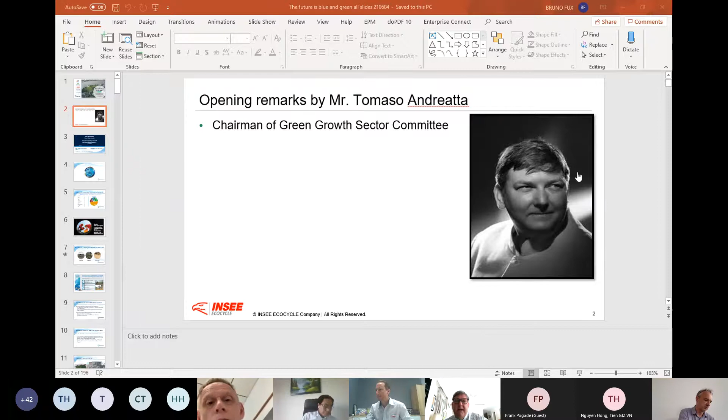As we know from science, life came out of the sea, and many myths around the world tell us how the sea would take life away, as in The Last Wave, an Australian Aboriginal myth that may be a memory of the post-glacial era, or maybe a warning of what will happen if we do not cease to heat the Earth's atmosphere. About 40% of the world population, according to the UN, lives within...

Tomaso? Yeah. We cannot... Can you hear me now? Yes, yes, yes, sorry, now it's good. Excuse me, tell me when I was interrupted.

That life comes from the ocean, and it can be taken away by the ocean. And that's all? Yes. So about 40% of the world population lives nearby the sea. We know that? Yeah, go ahead. Yes, please. Excuse me? Yes, please go ahead.

In the last 10 years, the sea level has been rising on average 3.6 millimeters per year. So by the year 2100, the sea may be 36 centimeters higher than at the beginning of the century. Still a lot less than the 10 meters higher it reached at the end of the glacial era, which gave so much hassle to Sid, Manfred, Diego, and friends from the Ice Age. Should we not be worried then?

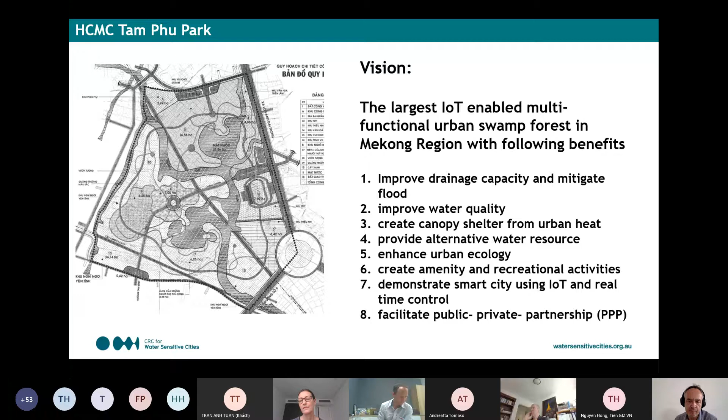Skip that slide. Just to remind everyone of the vision that we collectively created from the last training session: the vision for Tam Phu Park is that we want it to be the largest Internet of Things enabled multifunctional urban swamp forest in the Mekong region, with a broad range of benefits. So the updated strategy and nature-based solutions are what's going to underpin and deliver that vision.

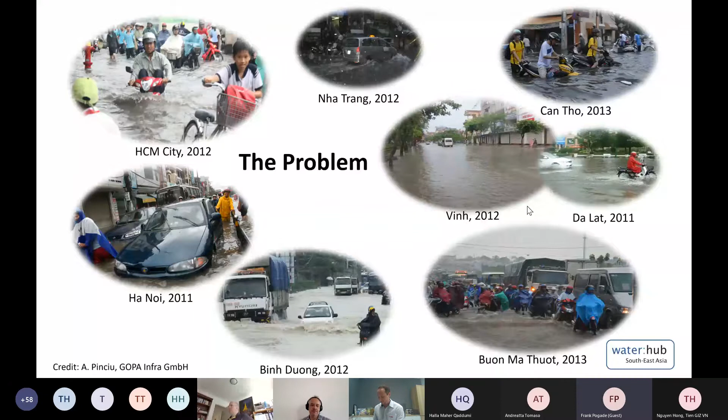There is some background noise. Could everybody please switch off the microphone?

Furthermore, numerous homemade problems are worsening the drainage situation in urban areas. Many of the mentioned reasons could be fixed through proper management actions that are actually not requiring huge investments or budgets. Based on my experiences in Vietnam, the very poor construction quality of much of the water infrastructure can be blamed for the many malfunctions, overloadings, and subsequent failings of the drainage system. If this underlying problem cannot be solved, all potential solutions we are suggesting in this webinar are doomed to failure.

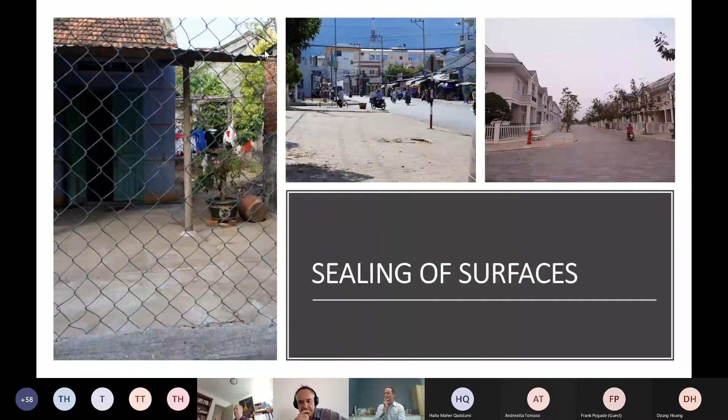The solution for all this could be blue-green infrastructure, or BGI. It's a growing market around the globe, based on pilots and basic research work done in Europe, Australia, and the US. BGI is definitely a success story in countries like China and Singapore. European directives are already requiring its application. An example from Germany: it is practically forbidden to connect new urban areas or industrial zones to existing stormwater drainage systems. All stormwater needs to be handled on site. This may be impossible under Vietnamese conditions, but BGI will definitely mitigate flooding and related damages to the economy.

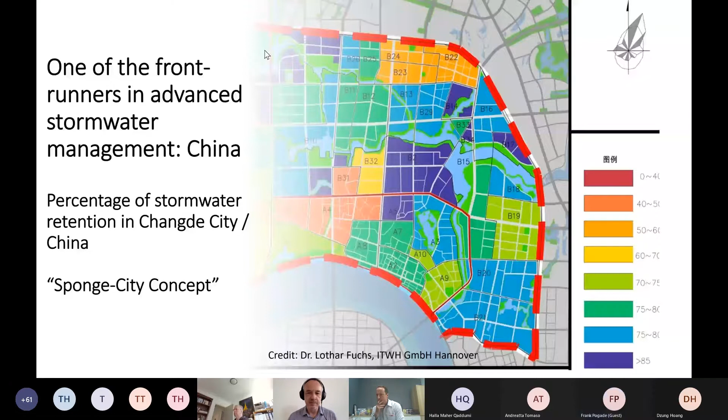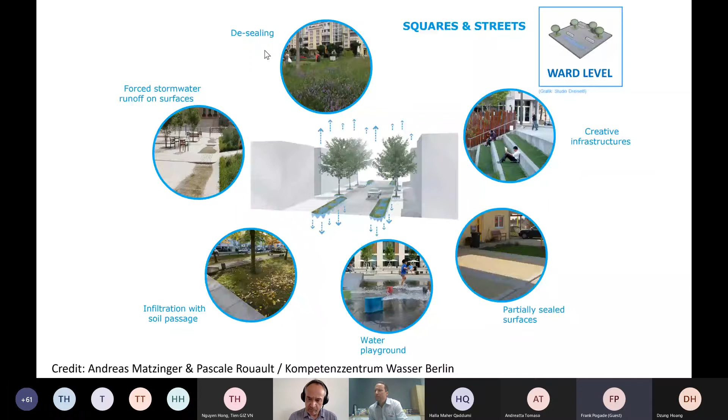On ward levels and in public spaces, the city administration can do a lot. This slide suggests a few measures. It is important to mention that many of these solutions can be applied to existing structures. That's very important, like desealing of concrete pavements.

On ward levels, green spaces play an important role. It is obvious that modern stormwater management will come with more green spaces for recreation, as you see here, even water playgrounds for children. Here, landscapers are to be called in.

The good news is there's already a lot of guidance on the planning and design of BGI around, and much of it in Vietnamese language. More and more trainings and workshops are coming up, which are supposed to equip planners and engineers with the required knowledge.

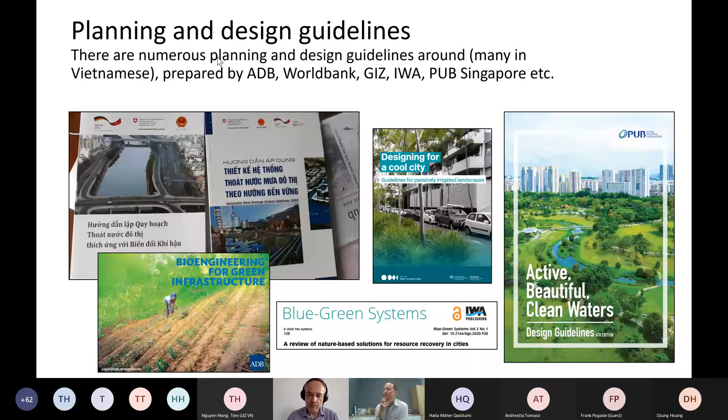Core to the SUDS principle is the integration into urban planning. It's probably the most difficult task to implement under Vietnamese conditions. It is, however, the precondition for success.

SUDS need physical installations for storage and retention of stormwater. They are usually underground or in buildings. The stored water will be released to the drainage system after the rain event, or used for irrigation, production, toilet flushing, etc. It could also be infiltrated into the ground.

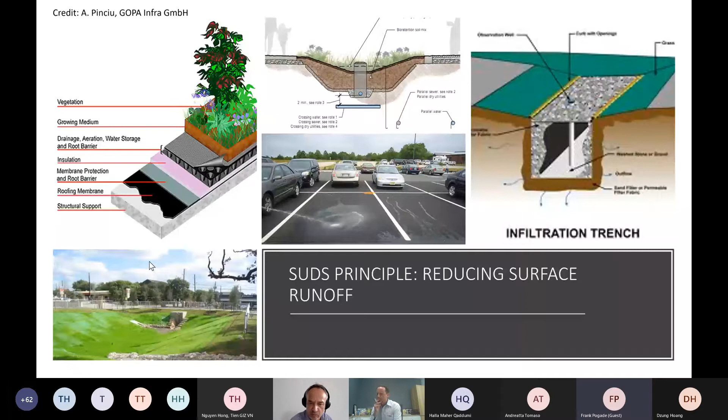There are dry and wet solutions and combinations of both, meaning water will be visible or invisible in the city. Either way, water will shape the urban landscape.

There are first examples in Vietnam, like this one in Saigon. It is a very nice starting point. It's Sala City in District 2. If you are around, go there, have a look. It's a very, very pleasant area, also very nice for a picnic.

The identification of potential SUDS applications requires a lot of knowledge on urban planning, landscaping, and technical solutions. Hydraulic and hydrological calculations have to be done, and this is not an easy task. Planting a few trees here or there does not help.

GIZ has carried out the first pilot project and applied SUDS in five Vietnamese cities, namely Quang Ngai, Quy Nhon, Tuy Hoa, Nha Trang, and Soc Trang. The table indicates the technical solutions that have been applied in the respective cities.

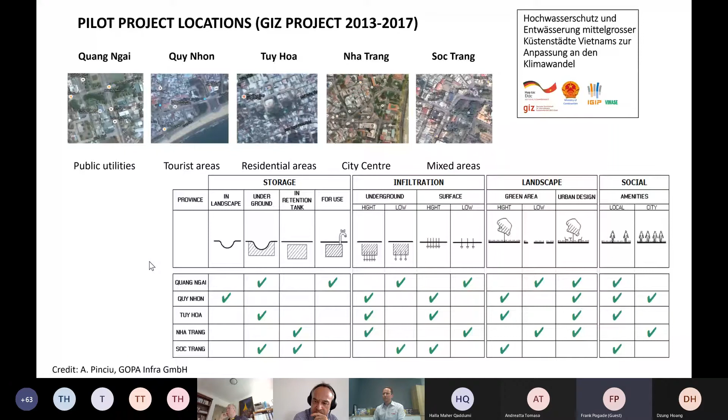These SUDS activities have been implemented, among others, in Quy Nhon. As you see, the SUDS approach is not limited to particular activities only. It's always a combination of many different implementations and applications that are interacting with each other.

There is suitable software around for the design and dimensioning of, for example, swales and trough trench systems. SUDS require complex engineering and calculations. It's not an easy task. You will have to have the suitable tools at hand.

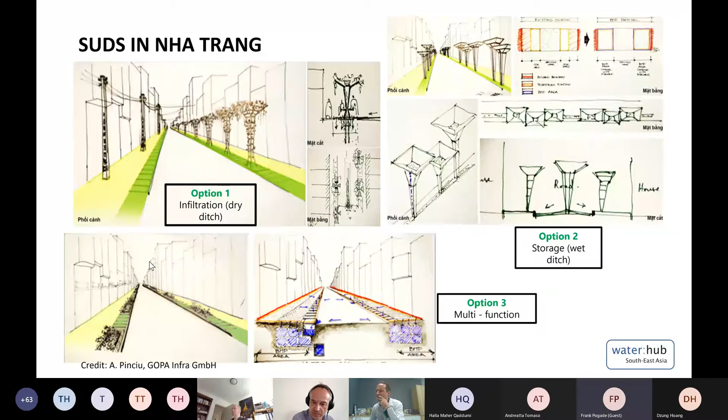With a solution like this, you will hardly believe that the greening of the streets actually goes hand in hand with reduced flooding. Things are happening underground and invisibly. Here, as you see, this is an area where the water can infiltrate into the ground. It is a technical installation which is not actually visible.

This is a combination of an existing stormwater drain, the typical Vietnamese solution, with a newly constructed swale where the overflow will be infiltrated into the ground.

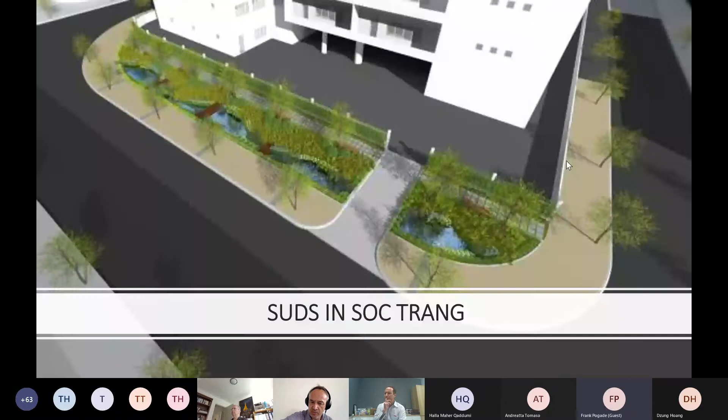I personally like this application. It's a trough trench system in front of a building in Soc Trang city, under the responsibility of a private developer.

Cut a long story short, there are already a number of very nice applications around in Vietnam. It's a starting point, and I think we all can learn from that.

Another good news: policy making and the development of a suitable legal framework is on its way. The Vietnamese Ministry of Construction has started integrating the SUDS philosophy into a number of publications, government strategies, and technical regulations. Things are obviously moving.

This development was supported by GIZ, and to my knowledge, more applications and policy-making support is on its way over the next years.

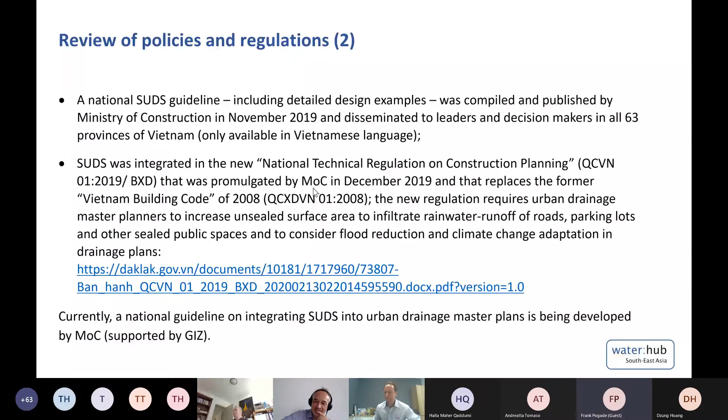Thank you, Frank, for elaborating on nature-based solutions and its very impressive benefits, and how there are many projects already implemented in Vietnam. I saw there were a lot of comments and questions in the chat function, so keep going. We will have a look at it at the end of the first presentation session, just before the break.

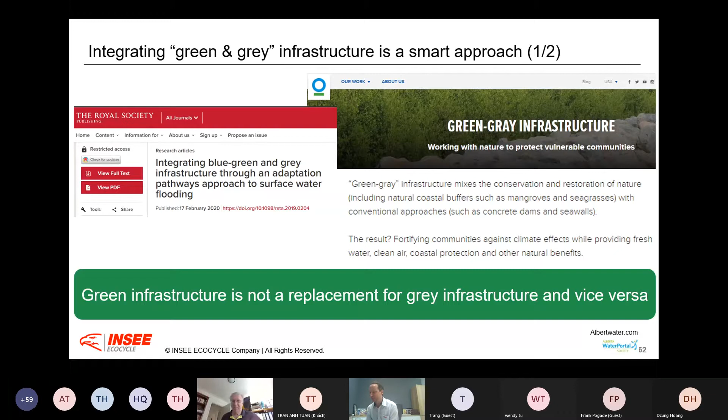Now, the question is, do we need only the green infrastructure, or only the gray infrastructure? The conclusion, not only from us but from many experts, is that we need both. We need to integrate the green and gray infrastructure - one is not a replacement for the other. A smart approach would be a hybrid green-gray approach, combining green ecosystem restoration with gray conventional engineering. Doing this will generate more benefits than if we only pursued one or the other strategy.

Now there is a little issue already mentioned by Tomaso in his opening remarks, about CO2 and climate change. We know that due to gray infrastructure, CO2 emissions have increased significantly over the last years. We know that even in the future there will be a lot of spending into gray infrastructure - dams, roads, bridges, etc. We're talking about $93 trillion over the next 20 years. On the other hand, about 70% of global greenhouse gas emissions are linked to carbon-intensive gray infrastructure - power plants, buildings, transportation, and the like.

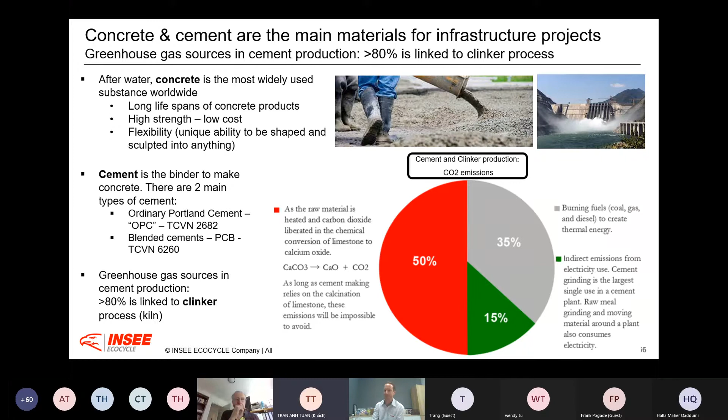So there is a global trend to go towards blended cements, and this will really reduce drastically the global warming, and it will support sustainable development.

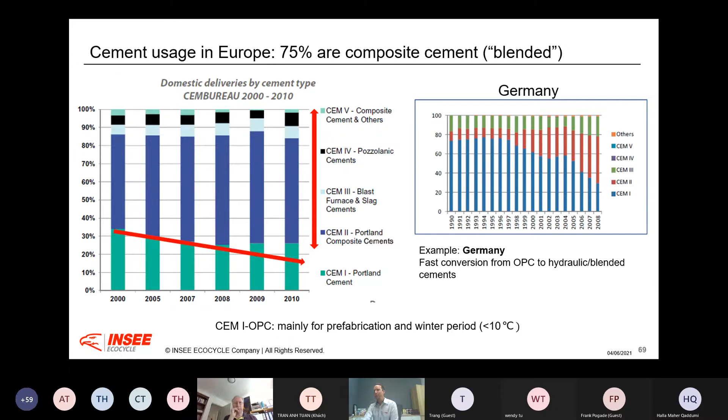And you see as well, over time, this is going down drastically for the OPC cement. So we expect a similar trend in Asia, in Vietnam. So in Vietnam, this blended cement has quite a lot of tradition. It's able to adapt to the local tropical climate.

It's as well efficient in terms of clinker availability. However, what we see over the last years is that the utilization of Portland cement, so high clinker cement, actually increased. This is mainly driven by project specifications that came from US and Japan, and they are one-to-one implemented here without considering the local situation. So it's copy-paste specifications. I think what we have to promote more is how we can increase and support more blended cements, because that's definitely the preferred solution for sustainable construction.

Before I go into concrete applications on how we support the grey infrastructure related to water management, maybe a few other green manufacturing aspects of INSEE Vietnam. So we have our waste heat recovery system, generating about 25% of our electricity from our own waste heat. We are in the process of a solar energy feasibility study to generate an additional 17 megawatts of electricity. We are using a lot of waste-derived fuels instead of fossil fuels, so more than 25% of our thermal energy comes from waste-derived materials.

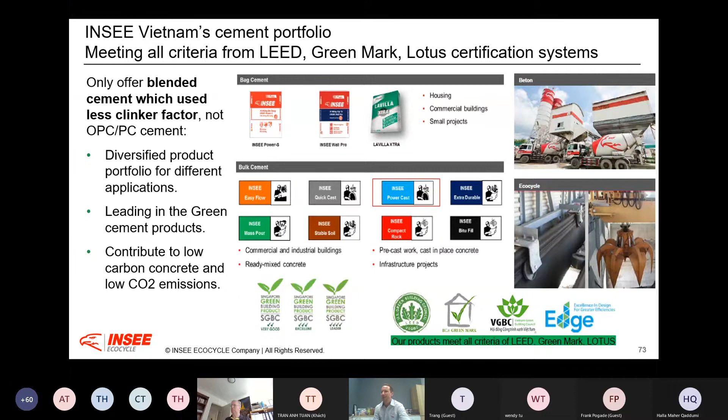These are our products that we have here in Vietnam. So we are offering only blended cements with a lower clinker factor. We are offering products which are specific to the application, and I will talk a little bit later on what these applications are.

One more product I would like to highlight is Conwood, which looks like wood but has the characteristics of concrete. So it's very durable, but it looks nice. It has a high recycled content material, about 25%, but as I said, is still very strong, durable, like concrete over time.

So how can our innovative cement and concrete solutions actually support urban development, water security, and increase the climate resilience of projects? Basically here you see all the potential aspects where our products, blended cements, can be used. Of course, in buildings, wastewater treatment plants, hydropower plants, airports, roads, metro lines, refineries, thermal power plants, so all industrial applications as well.

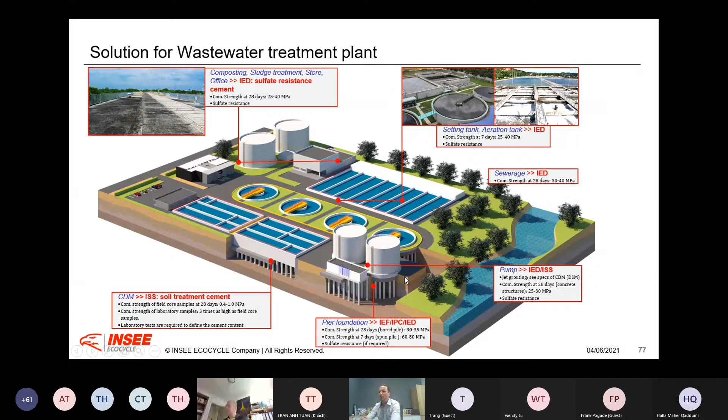So to give you two examples, one about a solution for a wastewater treatment plant. For each application we have a specific product addressing the needs of that application. We have INSEE Extra Durable, which is a sulfate-resistant cement. This is extremely important, especially when operating in salt water or in regions where this is becoming an issue. We also have our own products for soil treatment cement, ISS, for cement deep mixing applications, for foundations and pilings. So we can really offer the right product for the right application.

As an example here, this is a water environment improvement project in Ho Chi Minh City over the last 5 years. You see here, this is a big work, a lot of grey infrastructure in order to support the blue infrastructure long term. We were one of the suppliers of our products for that application.

Then, of course, and we have seen some hints on that in Frank's presentation, it's important to design and implement roads and canals appropriately. So here as well, we have dedicated projects and products for that, be it in prefabricated products, piles, pipes, etc. We can provide our products to meet the needs of our clients there.

Here as well, this was a project a little bit back in time, unfortunately, in Ho Chi Minh as well, where we helped with the environmental sanitation project in Nhieu Loc and Thi Nghe Basin.

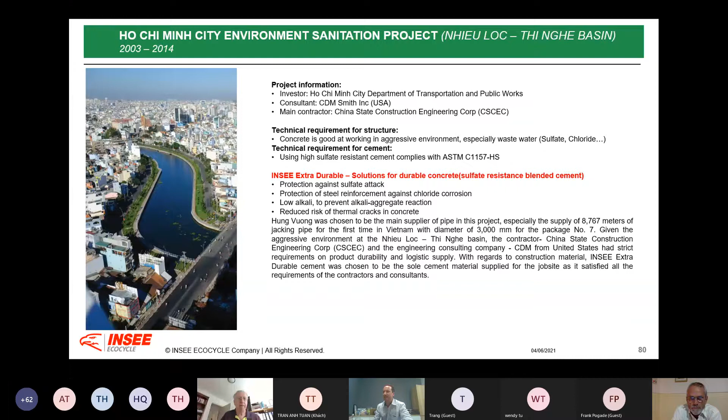Now, there are other solutions we can offer on wind power plants. So we are providing our products to Tra Vinh, Bac Lieu, to the windmill plant there.

And then I think this is the last product I would like to briefly introduce. This is Hydropath, a water permeable concrete. I think Frank showed this as well as one of the solutions. There are a few applications already here in Ho Chi Minh and in Hanoi where this is implemented. So this is basically really a concrete that helps water go through easily and drain away easily.

So as a conclusion, I would like to highlight maybe three things. First, we have to integrate the green and the gray infrastructure. It has clear benefits—only together can we provide innovative solutions. We can provide water security as well as increase our climate resilience, and this is an increasingly important topic for Vietnam.

Construction materials for this gray infrastructure with a lower environmental footprint are largely available in Vietnam. We are talking about blended cements and application-specific products that can support sustainable, low carbon footprint gray infrastructure.

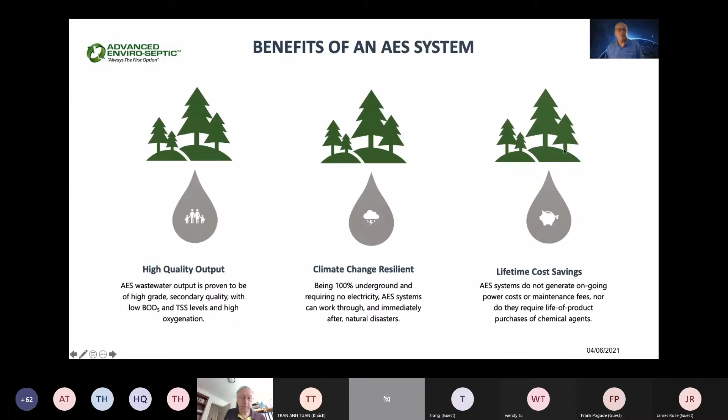Climate change resilient, so again, completely 100% underground, requiring no electricity. The AES system can work through cyclones, bushfires and natural disasters. And it's a very high lifetime cost saving, so you really don't need much other than a standard septic pump out every 3 to 5 years, and that's pretty much what you have to do.

So the AES addresses several problem areas. It's pretty robust - you can go on vacation or holidays, and when you come back it'll be working straight away, pretty much. It can handle loading, high loads, so you can have a party and generally speaking it can handle it.

So no need for maintenance - again, fully self-contained, no chemicals and mechanical devices. And communities can use them to build one system for several places.

So the AES system wastewater treatment quality for BOD is 8 in Australia. The 10 milligram per litre is the 90th percentile, and every test has to be under 20. And likewise for suspended solids, again, both easily meet that.

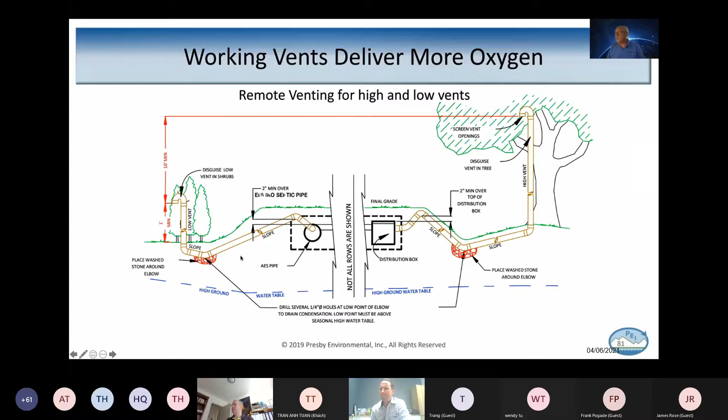The AES system uses differential venting, has a high vent which sucks air through the low vent, a minimum of 3 meters differential, goes up through the treatment pipes, then out through the septic tank, and then out the high vent. Most of the systems we do, the high vent is on the house. This particular example just shows that we can remotely locate the low and high vents. The advantage of the pipe is it's completely passive.

It disperses well into the surrounding grounds. No mechanical devices, electricity, or chemicals. Durable, non-biodegradable components, and they last indefinitely. So again, that's just a typical example of what the AES looks like.

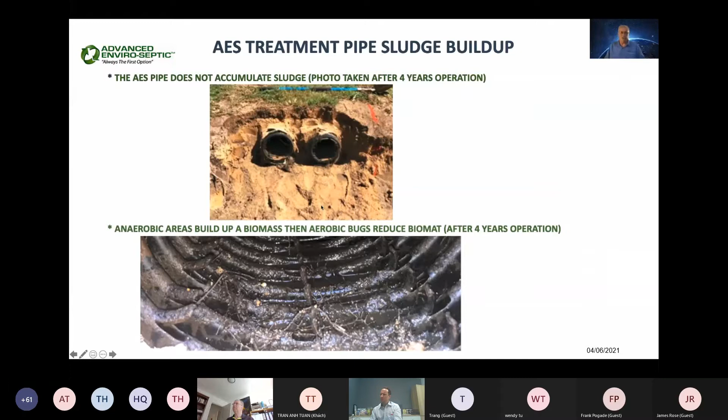A good question was asked: do we get sludge build-up in the AES treatment pipes? We don't, but I didn't know the answer initially, so it's a good question. This photo was taken after 4 years of operation, and you can see down the bottom very little build-up of sludge. That's because it alternates between anaerobic and aerobic. The anaerobic creates a biomat, and then the aerobic treatment removes that, so it continually fluctuates up and down.

The AES is good for urban spaces, suburban spaces, and commercial applications. We've done a lot of commercial systems. In the States, they've done at least up to 200,000 litres a day, probably more. It's good for rural and regional areas too. We've done them on little blocks of land, and we've done them on big blocks as well.

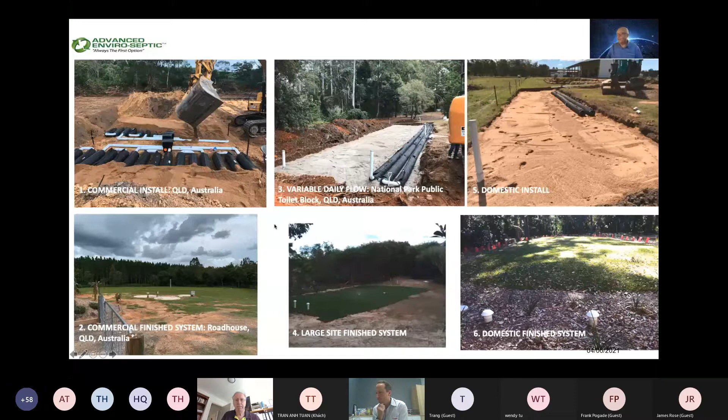This example is a 150,000 litre per day system, equivalent to about 1,000 people. This one was set up into 5 separate treatment beds, so that as the development progressed, they could add treatment pipes in. That way you're not up for the total huge cost of a big treatment plant if you're not using it until you need to.

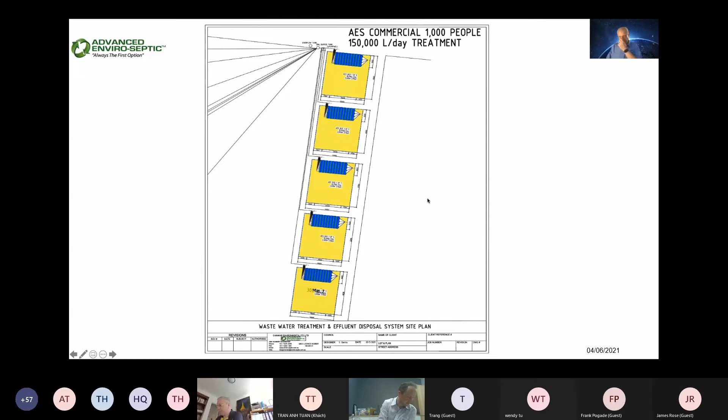So recapping, the AES system can certainly solve many wastewater problems common to the APAC region. It's used all over the world, with well over 400,000 systems globally, about 5,000 in Australia, and over 1,000 in New Zealand. It's certainly sustainable and cost effective, especially looking at lifetime costs. Again, no electricity, no chemicals. Chlorine can be a fairly dangerous chemical and can actually kill the soil.

There's no maintenance other than a standard septic pump out, avoiding all the issues you get with standard aerated wastewater treatment systems. It's got a lot of community benefits, especially if people want to get together and put in a common system, plus a lot of environmental benefits. It's certainly tried and tested technology with full support, invented in 1995, and that particular system used for trials is still working. It certainly meets a lot of sustainable development goals.

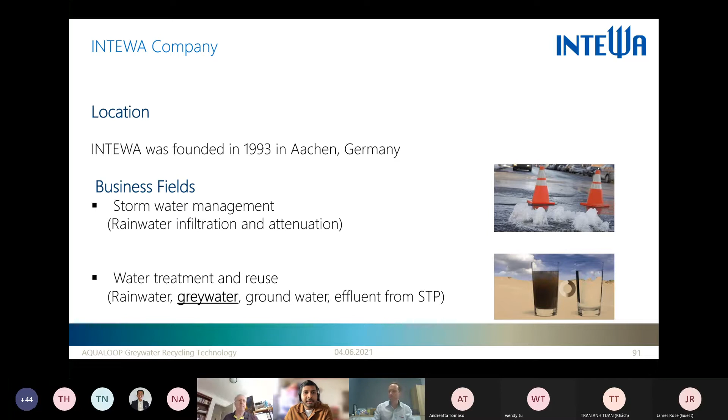Grey water recycling is quite new, but not really new. Let me explain briefly what grey water is. This is the water coming from showering, bathing, washing hands, and washing machines, which has a very low BOD, less than 180 milligrams per liter. Normally we use this treated grey water for toilet flushing, washing machine use, general cleaning, irrigation, and further applications such as cooling towers.

Let's see what the benefit is of using or recycling grey water. First, you save on both potable water costs and wastewater costs, and you also become independent of fluctuating drinking water and wastewater charges in your country. Depending on local water charges, this can give your project or system a payback period of less than 5 years.

This also increases the value of your property - we call it sustainable investment - and you can market your building as green, for example. And of course, you need smaller space because you produce grey water every day, treat it every day, and use it again every day. So it's a very compact system. I will show you how the system looks.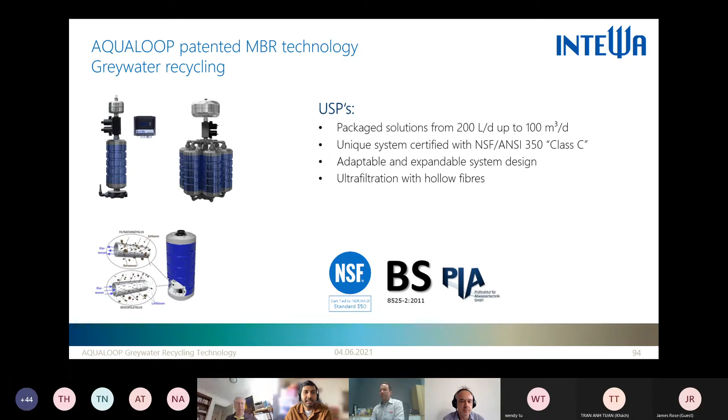The system is adaptable and expandable, because as you see here, we can put more membrane cartridges into one membrane station, so in the future you can expand the system according to the situation. We work with ultrafiltration using hollow fibers, which retains bacteria and viruses. So you also don't need advanced chemical additives for disinfection, because this ultrafiltration also works as a final disinfection step, since chemical additives such as chlorine can be harmful.

This, for example, is our one family house system with 300 liters per day capacity, for 5 to 6 people equivalent, using two 350 liter tanks. The first tank on the left is our bioreactor tank, and the right side holds the treated grey water. This is very compact - you can install it in the basement, garage, or installation room of most domestic houses due to this small space requirement.

I also have the bigger system for commercial use. I will not explain the biological principle and the details of the process system due to time constraints.

I want to say also briefly, on the left side, this is also bioreactor tanks. You see, we put the membrane filtration and also the biological degradation take place in the left tanks, and the right side is the clean water tank.

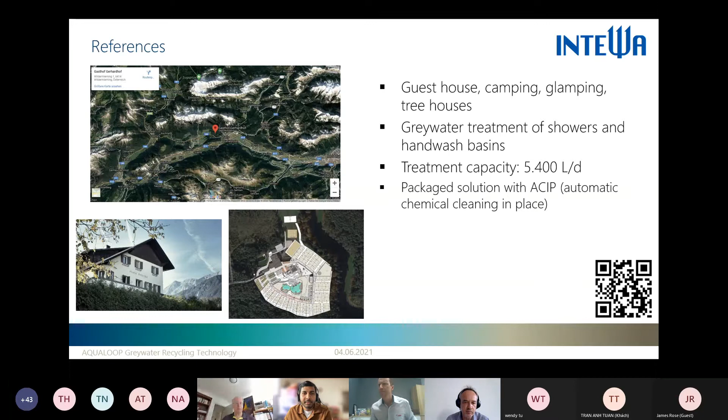This capacity is 5,400 liters per day, using water from showers and hand wash basins for the purpose of flushing toilets, and including also automatic chemical cleaning in place. So it's a package solution we sold, including indoor tanks.

And also the second reference, we have the system installed in a Sport Center in Los Angeles, US. They collect the grey water from showers as well and wash basins, and use it for flushing toilets as well as for irrigation.

As I mentioned in the beginning, besides the grey water system, we developed also a system in stormwater management area, like infiltration and retention trench systems, that's very useful in countries, for example, in Southeast Asia, with very high rainfall events.

And with these tunnels, we claim this is the best price per cubic meter due to the geometry of these tunnels. We require only minimum transport volume because, as you can see in the truck, it is stackable, and we need only minimum space requirement. On the other side, it has a huge storage volume, about 1.6 cubic meter per tunnel. You can store water underground. So that's why we say it's the best price per cubic meter.

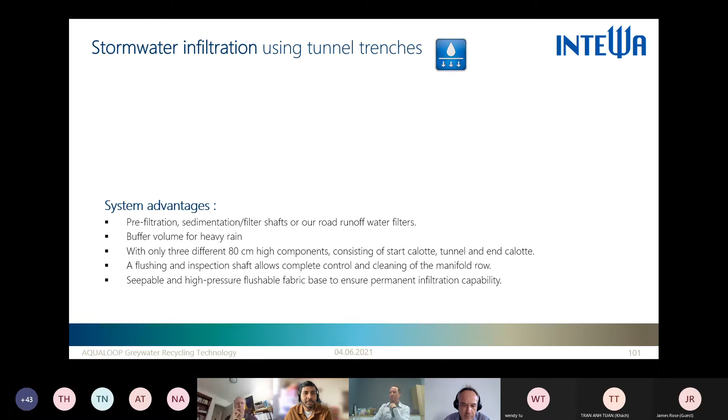And this is made in Germany. We call it DIBT certified, so we have extremely stable and loading class up to 60 tons. This is also easy for installation, you can carry it with only 2 people due to the weight. The picture will come later. And also the bottom of the system is washable for maintenance purposes.

This is the first system installation schematic, for example, for stormwater infiltration, just in case if the soil is capable of infiltration. So this has become essential in new construction and also in areas with excess rainfall events.

The system consists of a pre-filtration pit, you can see on the left side, the middle is the tunnel itself, and the right side is the control pit. So first the rainwater coming to the tunnels is purified through sedimentation or pre-filtration pit, and this also acts as a sedimentation pit, and we can draw out the sludge frequently from this pre-filtration pit.

In case you are collecting rainwater from the street inlet, we also have pre-filtration to minimize or treat these heavy metals contained in the street rainwater inlet. And above these tunnels, you can also use it such as for access roads or parking space because of the heavy loads up to 60 tons.

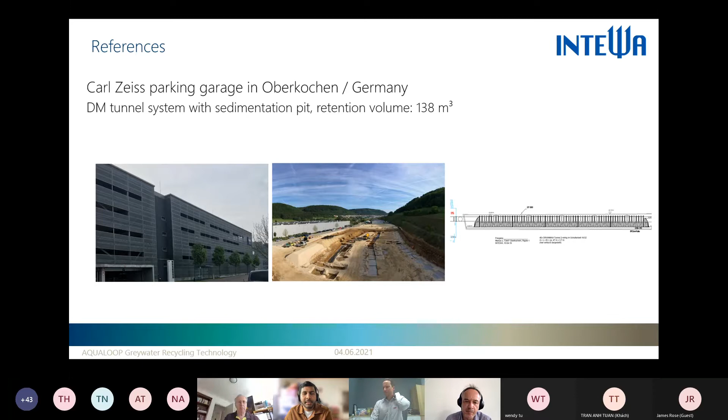I think that was a very short presentation with information on our greywater recycling system and stormwater management for infiltration and retention system.

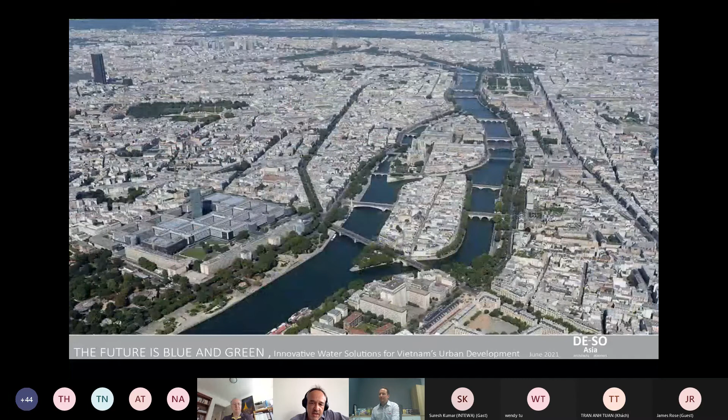Next, so we are responsible for a very big project. This project is in a Thu Thiem area. We won the competition 12 years before, and we are actually doing the basic design. We won this competition because we created a park - a park with a permeable area. This park can accept water from the city. It can accept the shadow of the tree, and this is very important in the city, to have such an area that can accept different types of water.

We are in front of District 1, and the strategy for this project is to try to collect some rainwater of the district and collect it in a basin. This was the first idea, but it was very difficult to do. The second reason why we did this project is that it can accept flooding in the city, flooding in Ho Chi Minh City. It's very important that some space in Ho Chi Minh City can accept flooding, especially some public space.

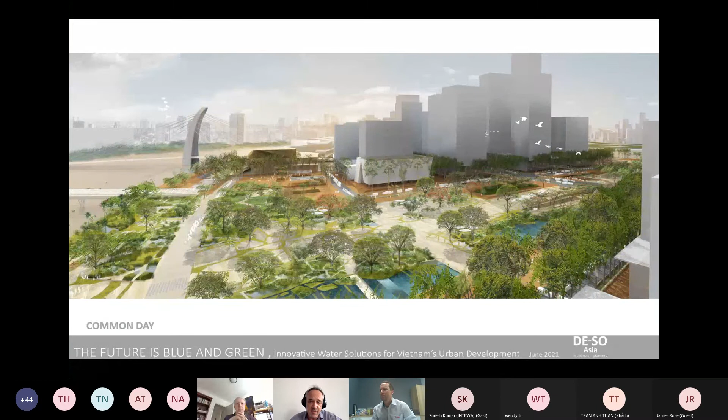This project accepts different types of water, and as a planner, I play with different strategies. For example, when it's raining, we obtain more and more water on this area. And this area also has a lot of basins that can collect the water.

Second project, we won 10 years before in Hanoi. Here we have worked on the geography - how a project in Vietnam can pay attention to the geography of the river. This area is in Gia Lam, near Hanoi. This is the site - we have a lot of water, and here we have many rice fields. In fact, we have imagined a place where the land can accept, like a big water tank, the flooding of the city. This is the concept.

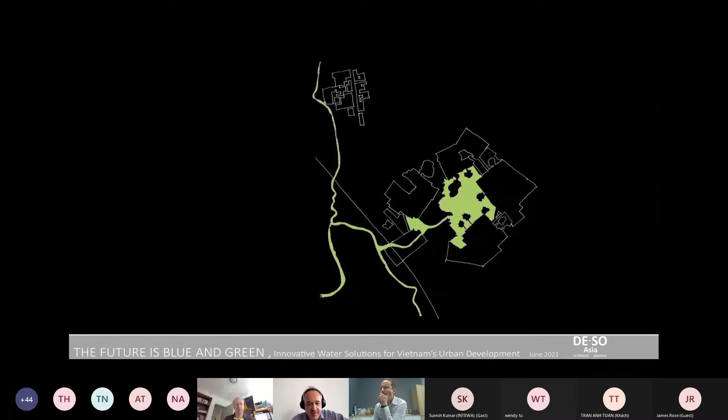The idea was to create, as we have also in Hanoi Lake in the city, a big water pond on the center where we have also altimetry very low, and we create water where all around we create different districts, different possibility to add different blocks. This is what I have on my screen, I remember 12 years before. And this is the project with, on the center, this very huge area who can accept a different level of water, and the water can be, in this project, the identity of the city.

It means that we need to accept that water is on life, and this is something since 10 years I work in Vietnam, very difficult. Many times we want to hide the water, we don't want to see the water on the city. And in this project, we completely change the way we can observe the water.

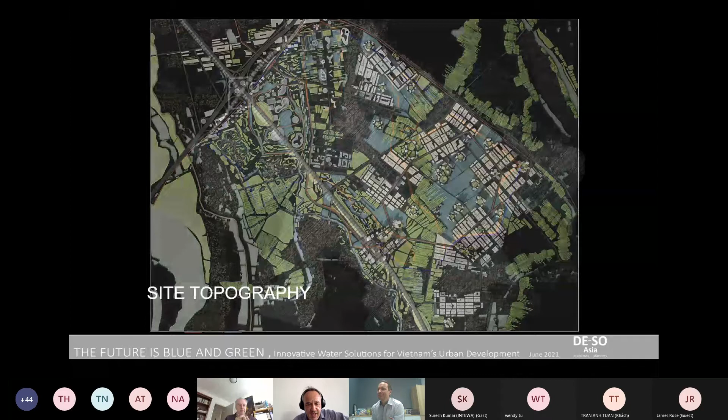So this is the project we have. We can see the water stop, and the water creates here a huge opportunity to create a different, very nice waterfront, different type of program for different owner. Also, we have in this project attention of green line and agriculture in the city.

It's a very short presentation, so it's quite complex to explain what is a concept, but I would like to explain that as a planner, I use the water in Vietnam to create opportunities in our project. It is a strategy to develop architecture, to develop planning.

Third project we have developed here. We don't win this competition, but it's important. It's in Da Nang, along Han River. The difficulties we have at this place is the city wants to create an attractive area along all this embankment.

And the strategy we try to develop was this one: the embankment can sometimes be a strong mineral embankment and sometimes can be more smooth, made with nature, small infiltration of nature. We have developed different types of embankment, soft embankment and hard embankment.

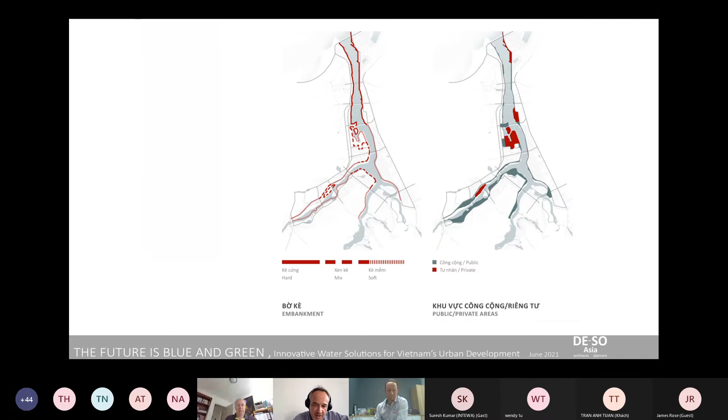And this was, in this project, the opportunity to develop different parks, different places where the nature in the city can be developed, a link with the water of the Han River.

Here you go, slowly. And what I would like to express here also, exactly like in the two previous projects, let's stop—this picture is very important—is we try to define the maximum border and contact between water and land. We know that there are many scientific or technical ways to do this, but also on planning, we can do that.

Everybody knows that the longer the limit we have between water and land, the more important it is, and the more contact we have when we are flooding or where we have rainwater flooding, it's very good to stop the water.

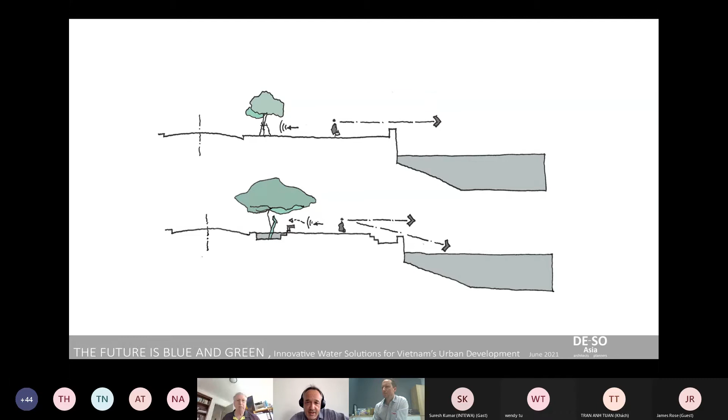And this strategy also in the city can create a different possibility to create different places, very attractive and very different. Also, as a planner and as an architect, we use some different strategy to better see the water on the city.

And the strategy is to absolutely stop the idea that we have a strong embankment, and the idea was to see the water on the city.

I try to go very quickly because I know that we are late, but my target was to provide all of you with the idea that planners who are at the beginning of the project can have a strong impact and develop many strategies with green and blue line.

Excellent, thank you very much Mr. Duque for your very interesting presentation, and as well this kind of mindset change that okay, water is not our enemy, it's our friend. It should be part of our daily life. We just have to manage it properly. Very interesting, thanks a lot.

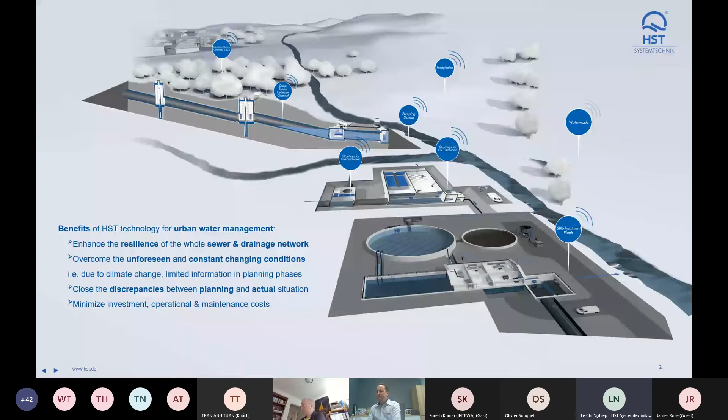The retention tanks have two main functions. Firstly, these tanks can temporarily collect and store excessive sewage, combined wastewater, and rainwater. Secondly, they pre-treat the collected water in case emergency discharge is required.

In normal conditions, waste and rainwater is collected in a combined channel, and then it is transferred and treated at the wastewater treatment plants.

However, in some extreme occasions, such as heavy or prolonged raining events, the incoming water exceeds the maximum possible load of the collector channel or the treatment capacity of the wastewater treatment plants, and the retention tanks are designed to handle this issue.

There are two main types of tanks in the retention tank: the catch tank and the sedimentation tank. The catch tanks are used to store the sludge of the waste and rainwater, which is highly polluted. Therefore, the water has to be treated, especially at the treatment plants later after the raining events.

On the other hand, the sedimentation tanks are used either to store excessive water for a short time or to discharge the rainwater to the water bodies. For the water entering the sedimentation tank, a floating solids retention system is required to treat the water and prevent pollution from the solids.

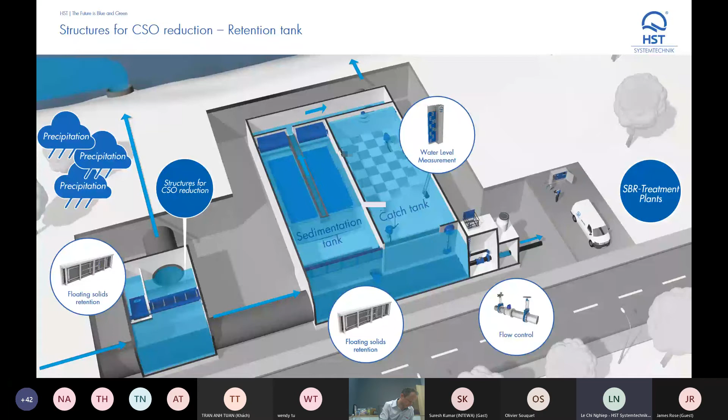Moreover, floating solids retention systems are also commonly installed at emergency discharge points of the sewer network. To protect our water sources during overflowing events, it is essential to have an innovative system to retain these solid pollutants effectively.

These photos demonstrate what an emergency discharge point looks like when the water level exceeds the maximum loading capacity of the channel; the overflow will occur. In this photo, there is neither equipment nor machine to pre-treat the overflows, and therefore the water sources are polluted by different types of solid pollutants, such as plastic bags or papers, etc.

The attention of overflow management has been raised since the 1950s, and the most simple form at that time was the fixed scum baffles. Nowadays, state-of-the-art technology in mass containment has integrated sensors, actuators, and intelligent automation software into operations, and the HSR screen from HST can integrate these technologies seamlessly.

So what is HSR screen? HSR screen is a horizontal or vertically installed bar screen with an intelligent control rake system. The screen is used to retain coarse and fine solids from rain and combined sewer overflows, and can significantly contribute to active protection of receiving waters.

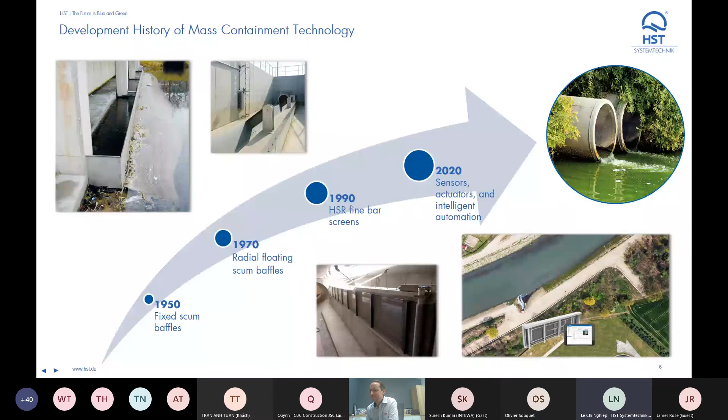Unfortunately we don't see the video. Can you see the video? No, unfortunately not. I suggest you add the link to the video to the presentation, then we can share it with the participants. Yes, after that I will send the link to the chat so you can see the video later. If that's the case, I will skip this slide, because at the moment we still see the development history of mass containment technology. Okay, one moment, because I saw my screen. Maybe you need to double check the Wi-Fi. Just go ahead, but the point is they are stopping at the very first line. Can you see my slide now? It is still this development history of mass containment technology. Okay, maybe I will stop sharing the screen and start again. Yes, please try it.

HSR screen, intelligent solution for overflow. Yes, this is the slide after that slide. Okay, so I'll just flip through this again briefly.

The HSR screen is a horizontal or vertically installed bar screen with an intelligent control rake system, used to retain coarser and fine solids from rain and combined sewer overflow. The screen can be implemented in different types of water structures, such as combined sewer overflow structures or rainwater reservoirs, and there are various possibilities of IT software integration. For example, to automate the operation, we can integrate with Hydropath, IntelliScreen, or IntelliNet. To monitor and control the screen, telematic or SCADA can be an option.

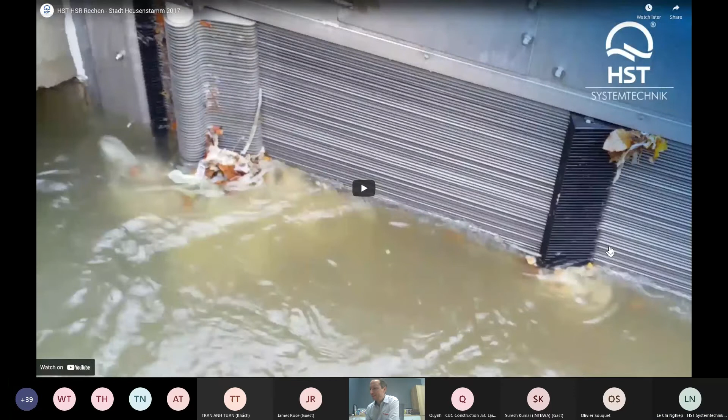Okay, can you see the screen now? Just black. Ah yes, now I can see the screen. Let's skip it. It doesn't work. I think it works, just go ahead. Can you see the video?

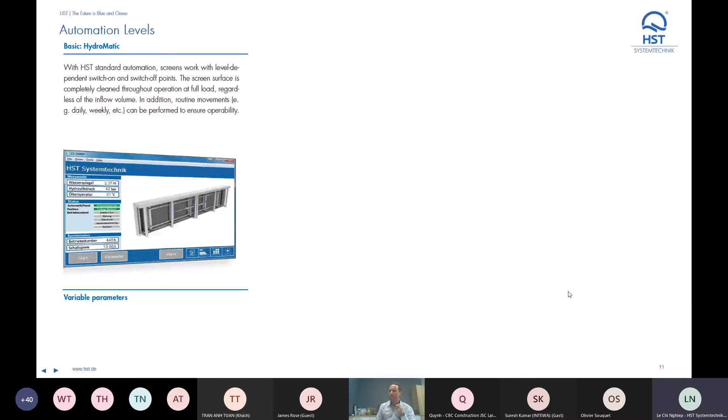In the second level of integration, IntelliScreen can control the screen with dynamic speeds based on some predefined parameters. The parameters can be the pollution or the water level, whose data is collected via the network of sensors in the channel.

At the highest level, external factors outside the combined sewer, such as the precipitation data, are taken into account to optimize the performance of the end result. For instance, after a long dry season, the first flush of rainwater is highly polluted, so the screens can be adjusted to maximum speed to retain the floating solids with the first waste and rainwater batches.

With these automation options, water operators can control the screen based on reliable information instead of traditional subjective assumptions.

This is the operation process of the screen at the highest automation level. NearWeb provides reliable actual and forecast precipitation data, such as the intensity, time, and duration of incoming rain events. IntelliScreen enables the dynamic optimization of filter performance by controlling the filter cake and its cleaning speeds. Finally, IntelliNet is the mastermind of the network because it collects data from different sources, analyzes the data, and then operates the smart machines, not only the screens but also other types of machines like weirs or flow control devices, to achieve the best scenario.

In the next slide, you can see a project in Ghana. This is a river water treatment. In Ghana, like in many tropical areas, they have the problem of high turbidity under stormwater conditions. In this plant, we treat this water up to potable quality.

In the lower part, you see another reference in Iran, where we supply the whole process water needed in a steel mill. Here we have another reference for seawater desalination in Egypt. Right now we are extending this plant by another 50%. Or a project of ours in Serbia, where we also treat groundwater for potable purposes.

In the context of this workshop, I want to highlight one of our products, which we call the UNIHA blocks. The UNIHA blocks is a prefabricated and modular water treatment plant. The idea is one block is a standardized unit operation, built in sea freight container dimensions. Out of these blocks, we then build the treatment plants. Depending on the local needs and requirements, we add several process steps, and this creates the total plant. We have one plant type ready-made, but I will speak about this a bit later.

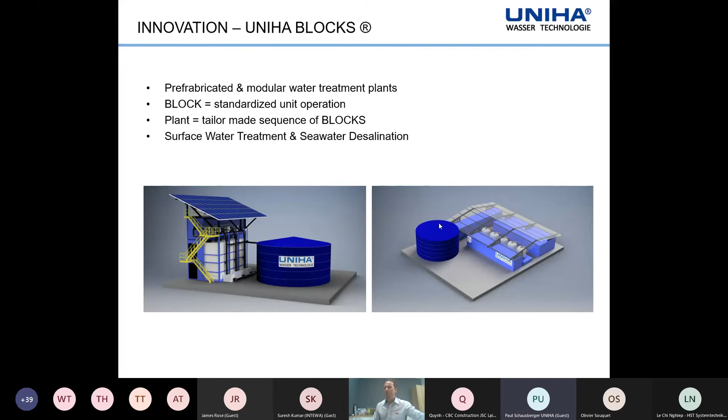So which blocks are available right now? We have aeration, coagulation, flocculation, DAF (dissolved air flotation), media filtration, ultrafiltration, membrane bioreactors, reverse osmosis, and then of course we customize pumping stations and tanks. All of these blocks are in container shape, which allows easy transportation, prefabrication, and in the end, installation on site on a plug-and-play basis.

So the first plant type we created out of these blocks is our so-called surface water block. This is exactly what we did in Ghana, the reference we showed before. This plant converts surface water, or more precisely river water with elevated turbidity up to 500 NTUs, to drinking water. This plant is fully gravitational, so it only needs energy for mixing and dosing. Here in the upper left corner, you see how this plant can look, including a product tank and a photovoltaic roof, which makes the whole plant energy autarkic.

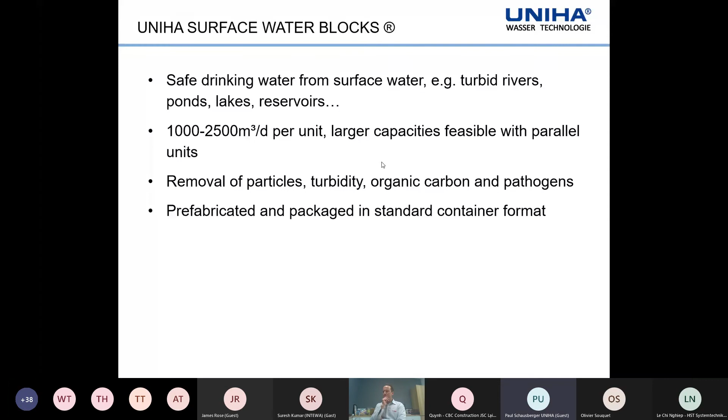So the benefits or features of this product are to produce safe drinking water from surface waters like rivers. The standard size of the plant produces between 1,000 and 2,500 cubic meters per day. If larger capacities are needed, we would build or offer parallel trains or parallel units. We mainly remove particles, turbidity, organic carbon, and pathogens. And as mentioned before, this comes prefabricated and packaged in standard container formats.

The second standard plant we have created is the seawater blocks. Here in the right-hand corner, you see one of these facilities as we built it in Iran for an industrial application. Again, we produce desalinated water from seawater for drinking or process use. One unit produces between 500 and 1,500 cubic meters per day. And again, if larger capacities are needed, we would produce and set up parallel units.

The plant itself contains the whole pre-treatment, whatever is required. This always depends on the location, on the type of intake, and of course the desalination itself. Desalination by reverse osmosis, or desalination in general, is a very energy intensive process, as you know. So our target is to achieve the lowest energy consumption on the market. We do that by using the latest stage energy recovery device, which allows us to desalinate seawater with less than 2 kilowatt hours per cubic meter.

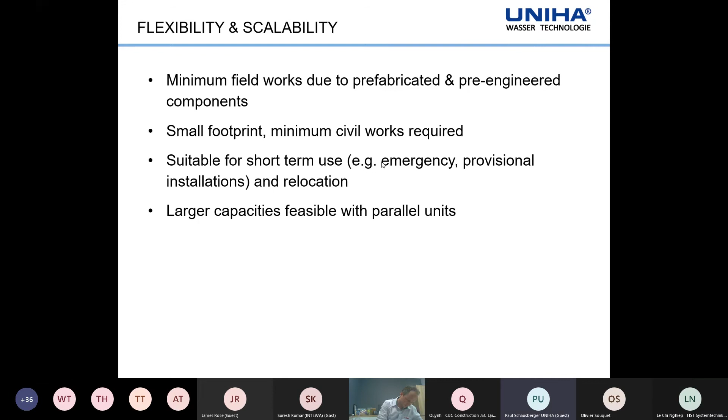Coming back to the topic of this workshop, the future is green and blue. In terms of water treatment, I think the main point is, of course, the energy consumption. What can we do as water treatment specialists? We can apply smart designs. The very first point is to use high efficiency machines, and of course to use energy recovery systems.

This is especially important in seawater desalination, and we have many cases where we show our clients the return on investment for energy recovery systems. In most situations, you will see that a good energy recovery system amortizes itself in a couple of months.

What we can do is also maximize the process recovery. If we have long intake routes, if we have difficult intakes, it may be better to increase the recovery of the plant to save on intake.

What is very important in my point of view is we need to consider part load scenarios. In many projects, we see that the plants are designed for a horizon of 2035, even 2050, where high increase in population is considered. As a consequence, when the plant is built, it needs to operate at part load, maybe 50%.

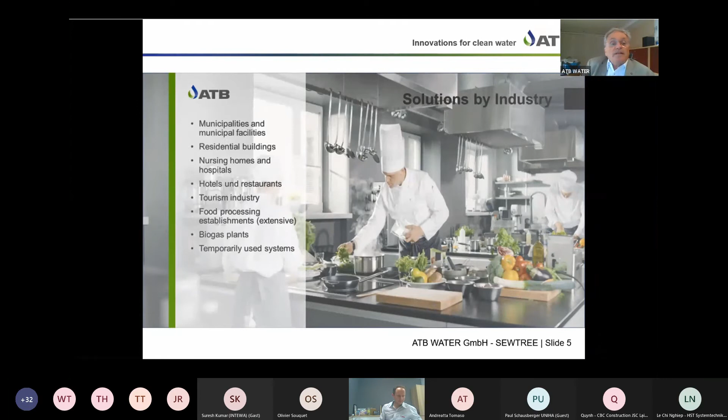What is our portfolio at the moment? Development, production, distribution of fully biological small and small-scale wastewater treatment plants. Small wastewater treatment plants run up to 50 people, small scale up to 5,000. Technical equipment for sewage technology, and also for the German market, multi-chamber tanks and collecting pits made of precast concrete. And this we support by a shop where you can buy accessories and spare parts for everything when you are working or dealing with wastewater. And we have our own service with maintenance and laboratory.

So here at a glance, you see a little bit the figures of ATB, and we are really proud that in the last months we have sold our treatment plant number 100 and 1,000.

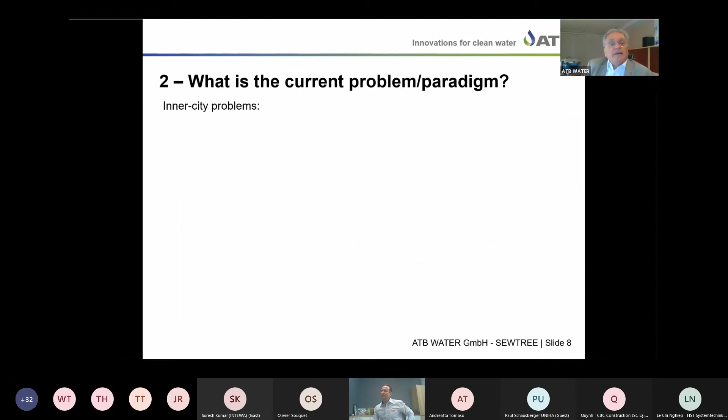Yes, so now we come to our problem, or to our presentation. What is the current problem or paradigm in inner-city problems? So, you know, the ground is sealed and you have a high building density, and this means a concentration of storm water and complicated structures. So also increasing heavy rainfall events due to climate change are also a challenge, like the increasing heating also due to climate change, and you know that buildings are staying a little bit longer warm when they are heated.

Limited space conditions, yes, that's for sure. The population density is much higher in cities than anywhere else. And until today, these problems have so far been addressed only insufficiently, or only for individual aspects.

Now, the SEWTREE is the only one system for all tasks, and it's a solution for an intermediate buffering of heavy rain events, a solution for the purification of this rainwater, the purification of surface waters, an improvement of the microclimate through humidification and cooling. And perhaps, by the way, it is also a system which could be used to treat real wastewater, but this is something that is a little bit more far away.

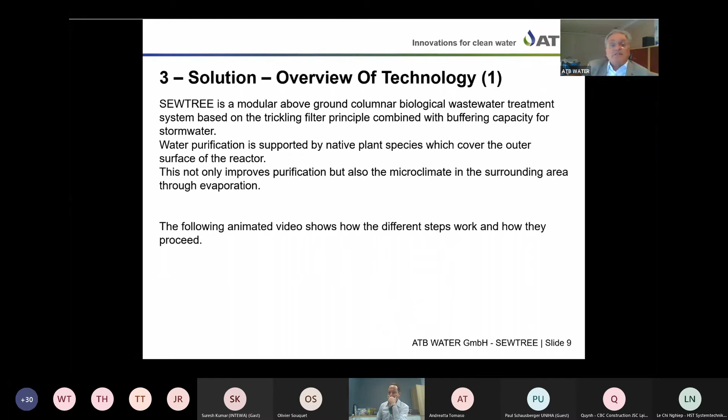What is the SEWTREE? The SEWTREE is a modular, above-ground, columnar biological wastewater treatment system, which is based on the trickling filter principle, combined with buffering capacity for stormwater. Water purification is supported by native plant species, which cover the outer surface of the reactor, as you will see in the following slides. This not only improves purification, but also the microclimate in the surrounding area through evaporation. The following animated video shows how the different steps work and how they proceed.

First of all, the working principle. The general working principle is with an underground storage tank. You see here this underground storage tank, then a pump which fills, by a pipe, the inner area of this trickling filter of the SEWTREE, and you see on the outside here the plants and the root area which support the treatment and which also have the effect that evaporation of the surrounding takes place.

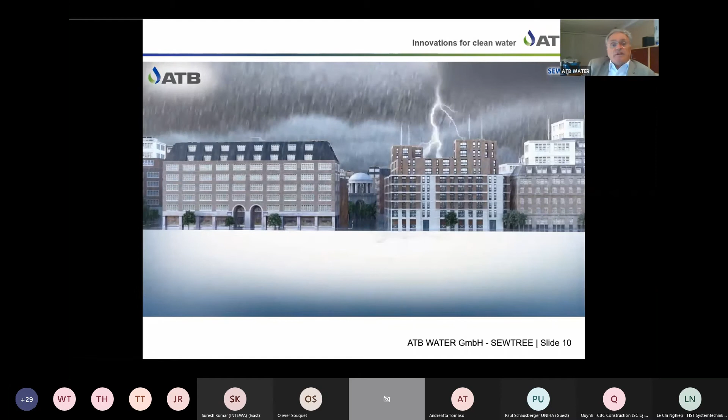So a typical application would be stormwater management. You see here, you have an underground buffer with a mechanical pre-treatment, so that a first rough treatment is made here underground, where you have a certain volume where the water can flow in. Then you have the possibility, if there is not enough buffer volume, to take also the inner part of the column as a buffer, and then the water will be treated by the trickling filter and the columns here. After the rain stops, the water will leave the column and will be let for a further purpose or wherever it has to go.

Another application would be lake and stream cleaning, so surface waters. You see here a pump also, which pumps continuously the water inside for cleaning purposes. And when you have heavy rainfalls and the water level is rising, you have also the possibility to buffer a certain volume in the inner part of the column, which was shown here.

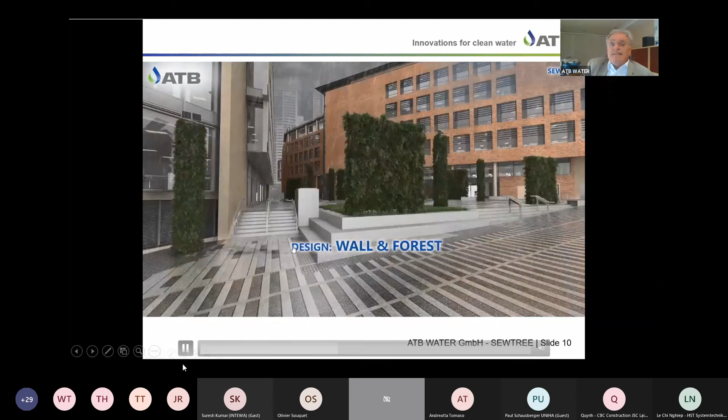The design is not reduced only to a column and to a circular shape. If you combine several SEWTREEs, you will create a kind of a sew wall, which then can enhance the microclimate by evaporation, which is shown a little bit here.

So this is for you, for a first impression, to see what is possible, what can be made with a SEWTREE. And now please let me explain to you in a little more detail the solution as an overview of technology.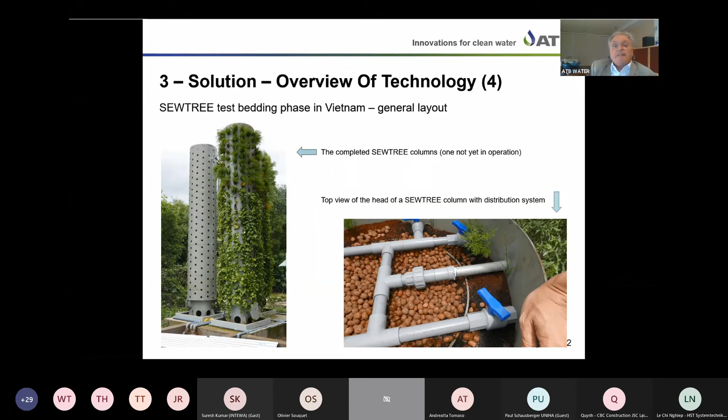In parallel, we made tests to look for other possibilities, how to fix the plants on the outside, about the root area, what we can do with that, and what kind of water - wastewater, rainwater - can be treated.

The tests were carried out with different wastewater concentrations. It was domestic wastewater. And also interesting - for the filling material, they also used plastic bottle caps as filling material in one column.

Data and information of the performance I will show you now. So you see here perhaps some interesting figures.

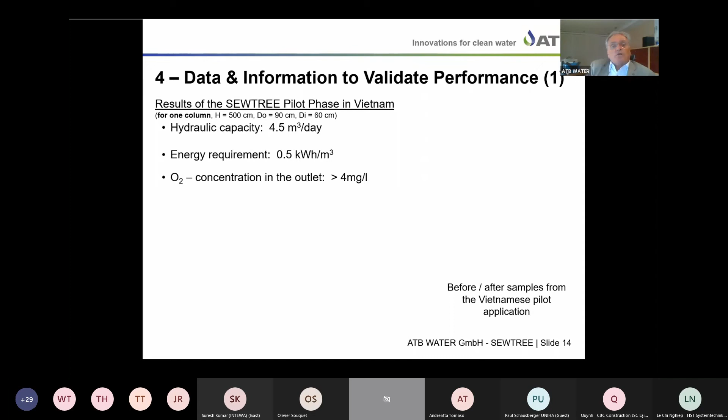The energy requirement for this equipment, as it was made over there, was 0.5 kilowatt hours per cubic meter. And the O2 concentration in the outlet was always higher than 4 milligrams per liter. The water temperature in the outlet was slightly lowered.

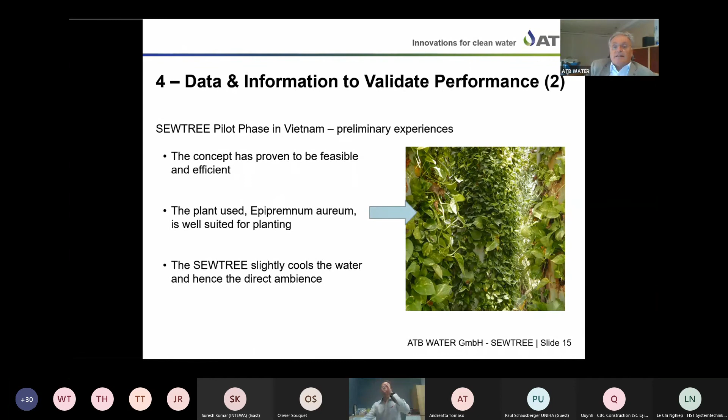But this is still a wide range of activities and investigations to be made. The OPEX, the operational costs, can also be lowered by energy optimized units and solar panels. And what is interesting also is to make coordinations with other infrastructures that can generate revenues, for example street lighting, mobile network, information advertising screens, electrical charging facilities. The combination of buffering, retention, and water purification, as well as the improvement of aesthetic appearance and climate in the inner city, results in considerable cost savings.

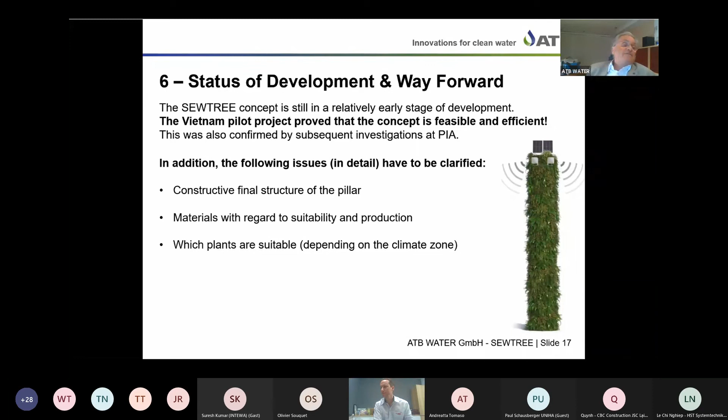In addition, the following issues have to be clarified: the constructive final structure of the pillar or column, the materials with regard to suitability and production, which plants are suitable depending on the climate zone. For example, the Vietnam test showed that this plant was very suitable for Vietnamese climate conditions, but perhaps in Europe you need other plants. Also the development of an optimized manufacturing process. Values for urban or landscape planning and urban development are still needed, and other topics.

Summary and next steps: the SEWTREE concept is suitable to offer solutions for current and future challenges of inner city areas. The basic suitability and first rough design and dimensioning could be determined. Open questions, as seen on the slide before, are very important to be answered for marketability. Additional pilot projects and expertise still have to be made, and later, perhaps, an outsourcing of the SEWTREE concept and potential products or business areas that arise from these activities.

You remember the presentation of ATB Water. We are close to these activities, but this means a different business.

The use of SEWTREE in public areas will still require a lot of supplementary research with various tests, pilot plants, and possibly required approvals and certificates. But to pour a little water into the wine, within the framework of an internal ATB strategy meeting, we have decided to push this idea first only for a very small market segment, namely as a cleaning system for private pond facilities.